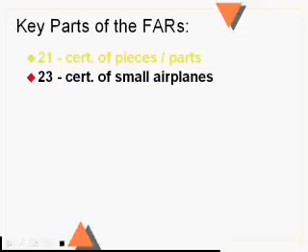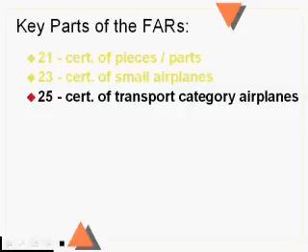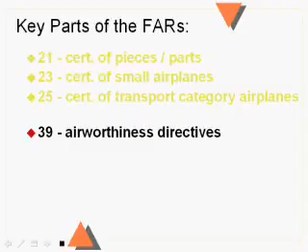If you want to certify an airplane, build an airplane and mass produce it and have it used as a transport category aircraft under FAR Part 121, that is for an airline, then that airplane has to be certified under Part 25. Of course, you've heard about airworthiness directives, and I'll talk a little bit more about it on another slide, but FAR 39 covers airworthiness directives.

FAR 43 and 91, interestingly enough, if you look in your FAR book, FAR 43 is there, and it's FARs for pilots, and you're going, wait a minute, FAR 43 is for maintenance. Well, you got a good point there. It does say, however, that anyone doing maintenance has to comply with FAR 43, and guess what? There are privileges and limitations for pilots and their ability to do a certain amount of preventative maintenance in FAR 43, so we're going to cover a little bit of FAR 43.

Effectively, FAR 43 is to airplane mechanics what FAR Part 91 is to pilots. If you go fly an airplane, you got to fly well enough that you don't violate Part 91, whereas when a mechanic is working on an aircraft, they have to do their job well enough so that they're not violating Part 43. Now, I'm sure you've read lots and lots of FAR Part 91, and the first half of it, the vast majority, is how well you have to fly, but that's not the part that we're going to cover in this class.

We're talking about certification requirements, about making sure the airplane is airworthy, not how to fly it. So we're going to talk about that second half of Part 91. It starts around 91.200 and goes up into the 91.500s. And that's the things that say, when do you have to do a 100 hour? When do you have to do an annual? When do you have to have an ELT inspected? What things on the airplane can be broke and you still get to fly the airplane? It's that second half of 91.

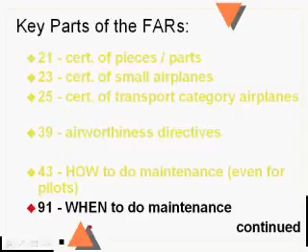There's a couple of things at the beginning of 91 we'll look at here shortly, but it's mostly that second half of 91 that you might not have looked at very closely that we're going to cover in this class to make sure that you can determine whether or not your aircraft is airworthy and is safe to fly. Like I said a minute ago, FAR 121 is the regulations that cover scheduled air carriers, or the airlines.

Part 135 is air taxi operators, or sometimes called unscheduled airlines. If you go to a fixed base operator and you want to give them $500 so they'll fly you in a twin engine airplane to Vegas, so whatever happens in Vegas stays in Vegas, and then you fly back and you want to go whenever you want and you're not going to do the flying, that would be a non-scheduled air carrier, or a charter operator is also another term for air taxi operators. That's under 135.

Now, flight schools, almost all of them in the United States, are certificated under 141 right now. Embry-Riddle at Prescott has some certificated under 141 and some under 142. You don't have to be a certificated flight school to get flying lessons. You just need a certified flight instructor and an airworthy aircraft, and away you go. But a lot of flight schools get their curriculum approved by the FAA, and the FAA approves them under FAR 141 or FAR 142. You probably heard of that. But there's another one in the 140s, 145.

That's repair stations. If you want to fix aircraft, you don't have to have a mechanic certificate to start a repair station. I'll give you a couple examples here. Let's say you're working in the military, you worked at the Air Force Academy, you've been working on their airplanes, and they have some piston engine airplanes there, and all you do is overhaul magnetos. You fix engine magnetos. You get out of the service, you don't have a mechanic certificate, but gosh darn it, you're really good at magneto repair.

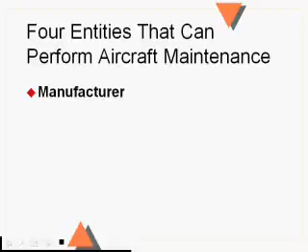There's 4 different, I guess not organizations or people because they're not all people, that can fix flying machines. The original manufacturer, Cessna, gets to fix Cessnas. Lycoming gets to fix Lycoming engines. McCauley gets to fix McCauley propellers. Garmin gets to fix Garmin GPSs. Cleveland makes brakes and wheels. They get to fix their own brakes and wheels. So if a manufacturer made something, they get to fix it.

Also, if you have a mechanic certificate, an airframe and/or powerplant mechanic certificate, or an A&P mechanic certificate, then you can work on airframes and powerplants. If you are a certified repair station under Part 145, you can repair anything that's inside of your limitations on your air agency certificate. And we're going to talk about it in a different lecture.

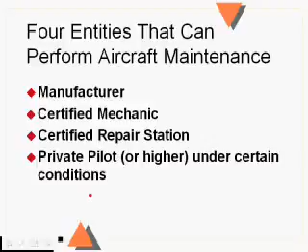If you have a private pilot certificate or higher, under the right conditions, you can do preventive maintenance on an airplane. Like you can change the engine oil and the filter, you can change the tire, you can clean out the spark plugs, you can service the battery, you can paint some of the airplane, you can redo the upholstery on the inside. There's quite a list of things in FAR 43 Appendix A that you can do as a private pilot. So these are the 4 entities that can fix flying machines.

Okay, what about getting your airplane certified? There's type certificates, and then there's production certificates. There's an old saying in aviation: how do you end up with a small fortune in aviation? It's by starting out with a large one. I'll give you an example. You start out with $2 million, had this great idea for a new airplane.

So you hire a bunch of engineers to come up with data to prove to the FAA that this is a safe airplane design. You build one or two prototypes, you fly it around, you fix a couple of things here, the FAA tells you to fix a couple of things there, and you demonstrate to the FAA that this design is safe. If somebody built it, it would be a good airplane and you could get it certified. Whenever you're building an airframe or an engine or a propeller, you have to prove to the FAA that it's a safe design. That's a type certificate.

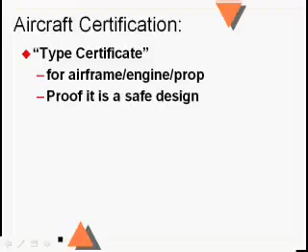So you spend $2 million getting your aircraft type certificated. But now you ran out of money. So you sell it to somebody for $1 million. They have $2 million, and with their other $1 million, they get a production certificate. A production certificate is kind of like a repair station. You have to prove you have trained personnel. You got to prove you have the equipment and facilities to do the work.

You got to have all the engineering data from the type certificate, and you got to prove you have an inspection program set up so that as you put the airplane or the engine or the propeller together, somebody comes behind the first person and checks to make sure it got done right. If you can demonstrate to the FAA that you can do all these things in a production line, then the FAA will give you a production certificate.

Now that you have a production certificate, essentially proving that you have what it takes to mass produce a bunch of these airframes, engines, or propellers, now you can mass produce them and you can sell them as a certificated aircraft, engine, or propeller. But that is technically a separate system from the type certificate.

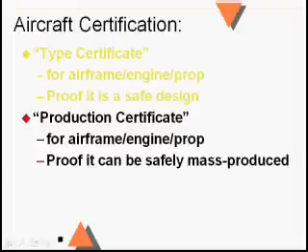Now, big aircraft manufacturers like, let's say, Piper or Cessna, they have the type certificate and they have the production certificate, and they didn't buy the type certificate from anybody. But they could sell the type certificate to somebody, but then they would have to generate a production certificate separately. So you got to get a type certificate to prove it's a safe design, and then in order to mass produce it, you're going to have to get a production certificate. In both cases, you got to prove this to the FAA.

Now that you've done that, as the manufacturer with your production certificate, you get to type up the airworthiness certificate, that half-page white paper with blue and black ink on it, and stuff it into the aircraft when you sell it. And essentially, that certificate is stating that when that aircraft left the factory, it was built exactly like the type certificate data said it was supposed to.

At that moment when it leaves the factory, they're gonna push it out the door and fly it around a few times, tweak a few things, make sure it's good. But when they hand you the bill of sale and you fill out the registration and you buy it brand new, that airplane is perfectly airworthy right smack at that moment. It's just like it just had an annual or progressive. The ELT has been inspected.

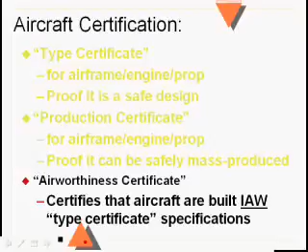The altimeter static system is good. All those inspections, there's no airworthiness directives on it. That airplane is essentially perfect and airworthy at that exact moment. Yay! I love perfect airplanes. I love imperfect airplanes for that matter.

Let's say you buy an airplane and you start flying it around and figure out that you wish it would go a little faster. So you try to figure out different fairings you can bolt onto the airplane to reduce drag. You think, I'd like to put a bigger engine in it so it'll go faster. Or you go from a fixed pitch propeller to a variable pitch propeller. Or you want to carry more stuff in it. Or you want to make the wings longer so it gets better gas mileage or can fly at slower speeds. These are all characteristics that change the airplane for the better.

Pretty much no airplane manufacturer will sell you an STC, or supplemental type certificate, because they want you to buy next year's model. If they think it's such a great idea, they'll put it into next year's model because they want you to buy the new airplane because they make lots of money. But other people, not the original equipment manufacturer, that's what OEM stands for. OEM is original equipment manufacturer. Pretty much anybody except the OEM does STCs.

For instance, out at the flight line, we have a couple of Cessna 150s. They took out the O-200 that put out 100 horsepower and put in an O-320 that has 150. So that Cessna 150 went from 100 horsepower to 150 horsepower. How do you think it is flying that thing around at sea level? Pretty fun. You could go pretty fast. You could tow gliders if you wanted to. This changes the characteristics for the better. You can put vortex generators on the airplane so it'll stall at slower speeds.

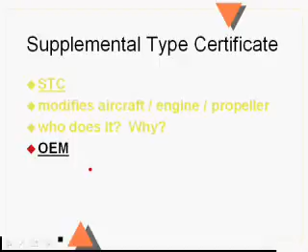One STC is an autogas STC. If you have an older airplane that'll run off of 80 or 87 octane, you can get an STC to run it off of 87 octane car gasoline, or MoGas as it's sometimes called. One could argue that improves the characteristics of the airplane because it'll burn less expensive fuel. That one's just a paperwork STC. You don't actually have to change anything. Well, I take that back. You have to put a placard by the fuel tank opening that says you can also put auto gas in it. So I think that's enough for supplemental type certificates.

Airworthiness directives, or ADs. Just like STCs, nobody calls them Sierra Tango Charlies. ADs, nobody calls them Alpha Deltas. They're ADs, or airworthiness directives. They come out every 2 weeks. Every single airworthiness directive is an amendment to FAR 39, and since FAR 39 is part of the Code of Federal Regulations, and the Code of Federal Regulations are federal law, that means airworthiness directives are federal laws. That's why you have to comply with them. That's why they're mandatory. Typically, airworthiness directives are published because there's an unsafe condition on the aircraft.

Years ago, they had trouble with 172 seat rails wearing out, and when you rotated the airplane, your seat would slide back, you'd hold onto the control wheel and slide back, pulling the control wheel with you, and the airplane would stall and somebody would get hurt. In fact, some people got killed doing that. So usually the aircraft manufacturer will send out service bulletins saying, hey, you need to fix this problem. But service bulletins under FAR Part 91 aren't mandatory. They're mandatory under 121 and 135.

So if people don't fix enough of them and another person has an accident, the FAA tells Cessna, fine, people aren't doing your service bulletin, we're going to make it mandatory, and they'll send it out in the form of an airworthiness directive telling you that something's got to be inspected, something's got to be repaired, maybe there's a part that's no good, you've got to take it out and put in a new one. It varies quite a bit by airworthiness directive.

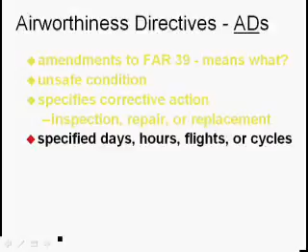It may say you have to inspect it or replace it within so many days, like you get 180 days, or within the next 100 hours, or before the engine gets 2,000 hours on it, or before the next flight, or over the next 100 flights, or engine cycles, engine startings. In particular on jet engines, they count how many start cycles, or on airplanes that are pressurized, they count how many pressurization cycles, or how many times you put the landing gear up and down. That's a cycle. So every single one is different on when you get it done.

If you own an aircraft, they are going to mail you the airworthiness directives that apply to your airframe, engine, and propeller. And if you don't understand what it says, you really need to take it to a mechanic or a repair station and say, hey, here's this airworthiness directive. Does it apply to my airplane? And if the answer is no, the mechanic or the repair station will write in your logbook saying this airworthiness directive doesn't have to be complied with because it doesn't apply to your airplane. But if it does, you got to take care of it.

In fact, the FAA, since they're mailing you the airworthiness directives as the owner, they are going to hold the owner responsible if they fly the airplane or they let somebody else fly the airplane. Even though an airworthiness directive was supposed to have been done, the owner is definitely going to get violated.

Also, mechanics and repair stations, when they do 100-hour or annual inspections or progressive inspections like we do at the flight line, every time that progressive inspection or that 100-hour or the annual gets done, the mechanic or the repair station is signing it saying, I certify I have inspected this aircraft in accordance with a 50-hour progressive inspection or 100-hour and annual, and certify it to be airworthy.

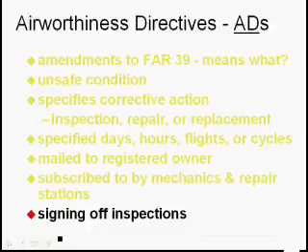At the moment they sign it, they have checked every airworthiness directive against the airframe, the engine, the propeller, the radios, the brakes, the ELT, the rotating beacon, and there aren't any outstanding airworthiness directives, so they get to sign it off. But it's only perfect at that moment. Now it's up to the registered owner to make sure that anything else that comes in the mail gets taken care of. And I already told you about signing off the inspections there.

Now, who's going to get violated by the FAA if the airworthiness directive isn't complied with? Absolutely positive, it's going to be the owner. If they get an airworthiness directive and they don't take it into the shop and get it complied with, and that airplane flies, whether it's the owner or they loan it or lease it or rent it to somebody else, the owner's going to get busted.

Okay, if the airworthiness directive came out before the 100-hour or the annual or the progressive inspection and the mechanic or the repair station missed it, they're going to get violated by the FAA if they signed off the inspection. But if they sign off the inspection, say, on August the 25th, and the AD comes out on August 30th, it's not their responsibility to take that airplane. They don't own the airplane. It's the owner's responsibility.

Now, you're all probably thinking, well, you know what? I don't own an airplane. I'm not a mechanic or a repair station. What about the pilot? What about the rental pilot, the pilot in command of somebody renting an airplane? Well, the FAA really doesn't want you flying airplanes that have airworthiness directives that are outstanding and haven't been complied with.

However, since they're not mailing them to you, it's very difficult for the FAA to violate a rental pilot if an airworthiness directive hasn't been complied with, because they aren't mailed to you, and there's nowhere you can look in a logbook and say, here's this airworthiness directive, because if nobody wrote it in there, it would be blank. So I'm not saying it's legal and safe to fly airplanes without airworthiness directives being complied with, but it's very hard for the FAA to violate a rental pilot. In fact, I'm going to say they can't violate a rental pilot if they flew an airplane without an airworthiness directive being complied with, because there's no good way for the rental pilot to check it.

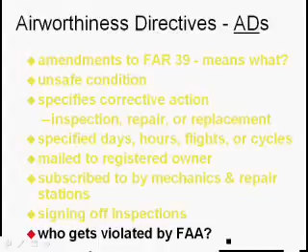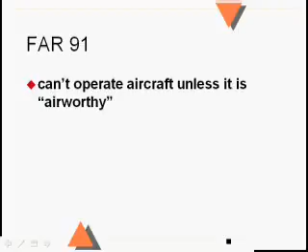Okay, there in the front part of FAR 91 is paragraph 7 or something like that. It says no person may operate an aircraft unless it's in an airworthy condition. Problem is, it doesn't do a good job of telling you what airworthy is. You look up in the front in Part 1 and it doesn't say, well, here's this big list of 25 different things to check, and if you check all that, the airplane's airworthy. So this is kind of the catch-all FAR. If you fly an airplane and it's not airworthy for any reason, technically the FAA can get you for it.

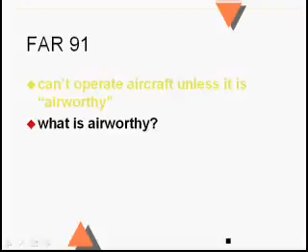What is unairworthy? I guess that means the airplane's not safe, for sure, but definitely unairworthy means it doesn't comply with the Federal Aviation Regulations. It also says in the beginning of Part 91 that the pilot in command, the PIC, is responsible for determining that the aircraft is in a condition that's safe for flight.

So here's the second paragraph where the FAA gets to pound on the pilot in command, because it's their responsibility for making sure the airplane's safe. Now, it doesn't mean the pilot in command has to do the pre-flight inspection. Somebody else can do it and come up and say, hey man, I did the pre-flight and it's good. It's up to the pilot in command to decide, does this person know what they're doing when they're pre-flighting the airplane.

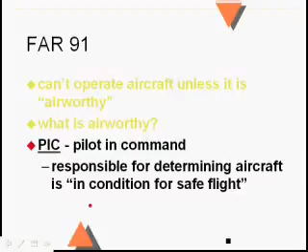In particular, under FAR 121, under the scheduled airlines, the pilots don't do the pre-flight. They do a walk around, but they don't do the whole pre-flight. They don't stick all the tanks and check all the hydraulic reservoirs. Somebody on the ground does that, but they sign it in a maintenance record that's in the airplane. We'll get to that in a later section. But the pilot's still responsible for making sure that stuff got done.

There's a list of things you got to have on the aircraft and be working. To go VFR day, you got to have a compass, airspeed indicator, altimeter, engine RPM gauge, oil pressure, oil temperature, like that. And none of those things can be broken and still go if you're VFR day. If you go flying VFR at night, on top of the things you need for VFR day, you also need a few more things like position lights and an electrical source of power, something like that.

And under IFR, you got to have everything you need for VFR night. Plus, you got to have a directional gyro, an attitude indicator. You got to have two-way radio communication. You don't have to remember anything on those lists for this course. You can look them up whenever you need to.

But there's also more things under Part 91 that, depending on your type of flight, you got to have on board the airplane. For instance, if you're going to operate for hire, you have to have an operational landing light, and that includes paying a flight instructor. A paid flight instructor is operating for hire under Part 91. You got to have operational DME equipment above flight level 240, and it's a very convoluted paragraph. It's really big, takes up like a page.

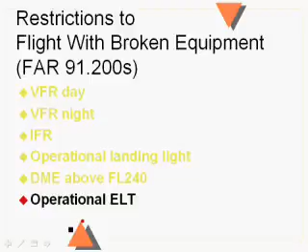You got to have an operational ELT. There's a few exceptions where you don't have to have one, but it's in FAR Part 91, the things you got to have in order to fly under certain conditions. So that's one place you would have to look. Now, if you want to fly with things that are broken, there are 3 different ways to get that done. You can either use a checklist that's in Part 91, you can get an approved minimum equipment list, which we'll talk about here shortly, or you can get a special flight permit, which also I'll tell you about here shortly.

Okay. You go out to the airplane, you're pre-flighting it, and the cigarette lighter's broken. You still want to go flying. You can use FAR 91, it's in the 200s, to legally fly an airplane, even though something is broken. I call it my 4 checks plus 3 actions found in FAR Part 91. You have to check 4 things, and then you have to do 3 things, and then if all of these things are good, you can go fly the airplane. You've heard of this before, so I'm going to go over it pretty fast. First, you got to make sure it's not required by FAR Part 91.

Is it day VFR? You don't have to have a gyro. If you're above flight level 240, you've got to have a DME. If you're operating the aircraft for hire under Part 91, you have to have an operational landing light. So there's several places in FAR 91 where you're going to have to look to see if it's required. You're also going to have to look in the approved flight manual.

In the back of the approved flight manual, the vast majority of the time, there's a list of components that have to be on the airplane and working under certain conditions. You have to comply with it as well. You're going to need to check to see if this component is required by an airworthiness directive.

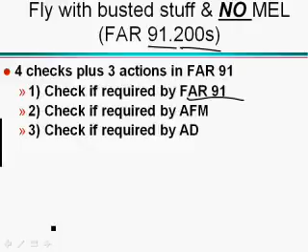Now, this is extremely uncommon, but what I find rather interesting is that if you have a turbine-powered aircraft and you have a NiCad battery, there's actually an AD about a temperature indicating system for the pilot. And there's an AD that says every single aircraft that has a NiCad battery has to have a temperature gauge for the NiCad battery, because NiCad batteries can have a thermal runaway and get too hot. But most of the time, this is the least likely one that you're going to check and have something be a problem.

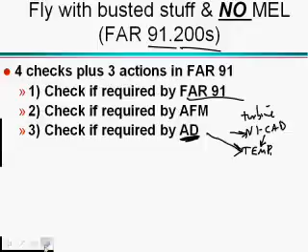You also have to check and make sure that if this component is inoperative for this flight, it's not going to be a hazard to the aircraft. Like if you're flying day VFR from Prescott to Kingman, I think it's okay if it's day VFR to Kingman that you don't have a directional gyro. It would not be a hazard.

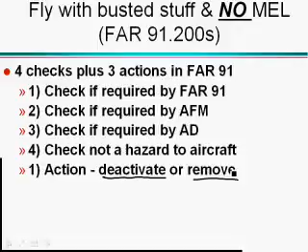So if you check all these things and they're not required and it doesn't make it hazardous to operate the aircraft, then you either have to deactivate the component or you have to remove it. Unfortunately, this is a maintenance action, and so is placarding it. You have to put a placard next to or on top of it, and it has to say inoperative. And I'm not talking a yellow sticky. It's got to be something permanent.

So that way, if somebody else operates the airplane tomorrow and they don't pre-flight it as well as you, they'll easily see this placard saying that it's inoperative. Like if it's the directional gyro and they're going to go fly IFR, the gyro is required by FAR, and I'm sure it's going to be required by the approved flight manual, and one might consider that not having a directional gyro flying IFR would be hazardous.

You definitely want other people to know, so that's why you're going to have to put a placard that you deactivated the component or you removed it, so that they'll know the next time they fly the airplane that something's wrong with the airplane and they need to pay attention to it. And since both of these two items are maintenance, you have to write it up. An airplane is unairworthy when you do maintenance until you record what you did in the maintenance records.

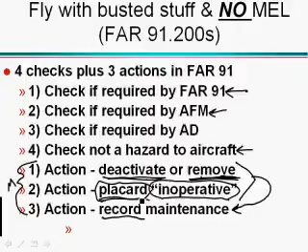Now, the problem with this is most of the time this takes a mechanic to do, since your privileges under Part 91 as a pilot don't have very many things that you can fix. So most of the time, in order to do this, you're going to have a mechanic come out and deactivate or remove it, placard it, and then write the maintenance in.

Now, there's another way to be able to fly the aircraft when something's broken and be legal, moral, and ethical. And that's having an MEL. I'm not talking multi-engine land, I'm talking minimum equipment list. Minimum equipment list is also described in FAR Part 91 in the 200s. When you first get an airplane brand new out of the factory, the manufacturer will come out with a master minimum equipment list, an MMEL.

But it only has the things on it that the manufacturer installed. Let's just say that it's a Lear 65. That's a big old honking $30 or $40 million business jet, and it comes out of the factory and it's green. They haven't even put the paint job on it. It just barely has minimum flight instruments and radios.

They fly it to some place where they're going to put the interior on it and put a paint job on it, and they install a blender and a DVD player and a computer and a hot tub and a vibrating bed and another blender, and a gold-plated toilet seat. They install all kinds of other stuff on it.

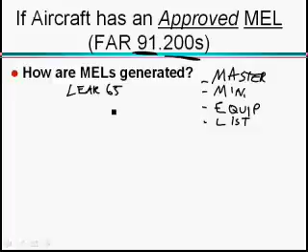So this master minimum equipment list doesn't have everything on it. So what you're going to do, as soon as you put all that stuff in the airplane, to have that all installed, you're going to write up an MEL, a proposed MEL. You're going to write up a proposed MEL, and you're going to send it to the local FAA office, the FSDO,

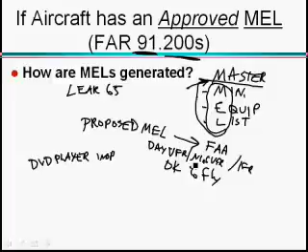and they're going to look at it, and you're going to write on it, if the DVD player is inop, you're going to say that day VFR, night VFR, or IFR, if it's busted, it's okay to fly. You're going to put everything on the aircraft that you installed, the VCR, the DVD, the vibrating bed, everything. If the toilet doesn't flush, it's still okay to go flying. You're going to write up in there everything else that's on the airplane, in addition to everything that was on the master minimum equipment list.

So now you get it approved. When you get it approved, then they are going to give you a letter of authorization, and you're going to keep that in the airplane in the same binder as the minimum equipment list. Now that's what it's going to be called, the minimum equipment list for that one particular aircraft. When you're writing it up, you're going to take into account anything that it says you've got to do in the FAR, anything that's in the approved flight manual.

You're going to check any ADs that might apply to the airplane. You're going to make sure that it's not hazardous. And you're going to take all this stuff into account when you write that MEL up, and the FAA is going to approve it. So now you're going to keep the letter of authorization, and you're going to keep the minimum equipment list on board the aircraft.

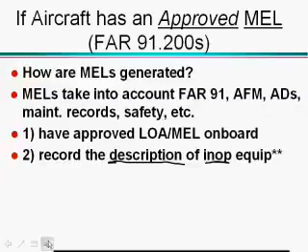When you go out to the airplane and you pre-flight it, anything that's busted, you're going to write it up. That piece of paper that you write it up on is part of the maintenance records. You're also going to look at everything else that everybody else wrote up. See, part of an MEL is it's going to tell you what you have to do in order to go flying, and it may not say you have to placard it. So that's why you're going to write it down, and that's why everybody else is going to write it down. So in the aircraft, as part of the maintenance records, is what's broken on the airplane, so everybody that flies the airplane can now know what's wrong.

So now you've got a list of the stuff that you find is inoperative, the stuff that everybody else found is inoperative, and you're going to read the MEL and see what it says you can do. If it's single pilot and there's a directional gyro on the co-pilot side that's busted, it's probably going to say you can go flying even IFR because you don't need to look at it. If the DVD player is broken, I think it's going to say it's okay to go flying. Also, if it has an O, then it tells you that the operator can take care of it. That means the pilots. If it's got an M, that means you need maintenance. Essentially, you've got to have a mechanic come out and take care of it.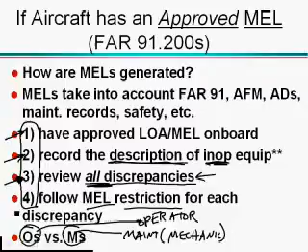These four things right here are the four things you're going to have to do. If an airplane has a minimum equipment list approved for the aircraft, you have to follow it. And you're going to have to be legal, moral, and ethical: make sure that the letter of authorization and the MEL are on board the aircraft. Make sure that you write down anything that you find wrong. Make sure that you look at the list of other things that have been found wrong before you got there. And then you have to follow the MEL limitations, restrictions, whatever it says you can or cannot do, you've got to do it.

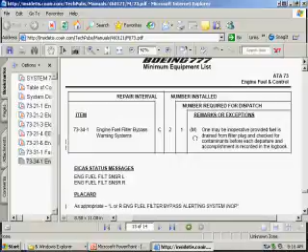I have an example here of a Boeing 777 minimum equipment list. I know it's probably really small and hard to read, but right here it says for the engine fuel filter bypass warning systems, there's 2 installed and you've got to have one that works. And M right here says maintenance has to do something. So 1 may be inoperative provided fuel, blah, blah, blah. So it's a little bit lower. Whoops, went too far.

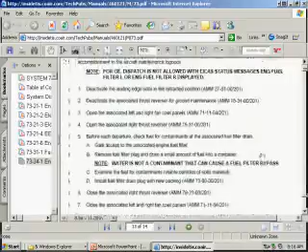A little bit lower. Wow, this one's pretty rough. Here it says maintenance, M, and then it lists all these steps that a mechanic is going to have to take in order for you to be able to fly the airplane. However, whoops, I got another one.

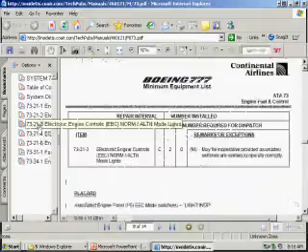Here's a different one. Here's for the electronic engine controls, EEC, normal mode. If that's busted, there's 2 on board the airplane. 0 of them have to work if you want to get dispatched, if you want to go flying, and the remarks is O. O means the operator.

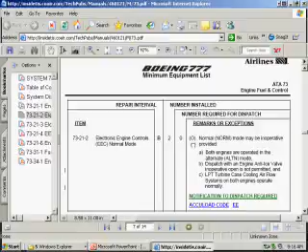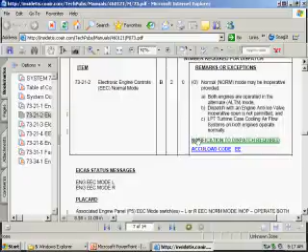So it says norm mode may be inoperative provided both engines are operated in the alternate mode, and dispatching with an engine anti-ice valve inoperative is not permitted, and the low pressure turbine case airflow systems on both engines have to be operating normally. And of course it says right here notification to dispatch is required.

So if it says O, then that means the pilots can take care of it. And if it says M, then that means maintenance is going to have to take care of it. You're going to have a mechanic come out and help you with it. And they're going to have to do something.

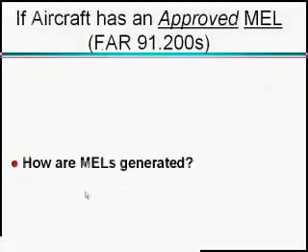Okay. Also in FAR Part 91, back in the 200s, it says if it's a turbine-powered airplane, so it could be a Piper Malibu or a Piper Meridian that's got a Pratt & Whitney PT6 out in the front, you can never ever use that 4 checks and 3 actions method from FAR 91, which means that you're going to want to get an MEL.

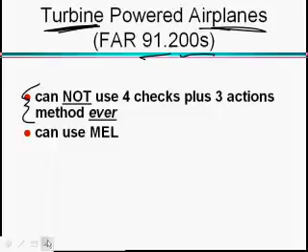And of course you can use the MEL, but let's say that the airplane is brand new and you haven't gotten the MEL done yet, and the DVD player breaks. Even though it's not a safety of flight item, you can't use the 4 checks and 3 actions method and go, well, it's not required by an AD, the FARs don't require it, blah, blah, blah, it won't be hazardous, we'll mark it inoperative, we'll deactivate it, and we'll go fly.

Nope, sorry. If it's a turbine-powered airplane, you can't use this system under Part 91, which would mean that if there's no MEL, if anything broke on the airplane at all, you're grounded. You can't fly. So guess what people are going to do who buy turbine-powered airplanes?

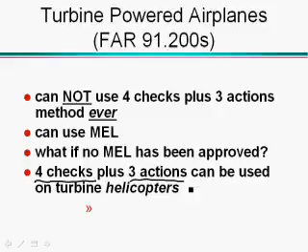The very first thing they're going to do is get their MEL approved immediately, and they're going to write up all the little things on the airplane that might possibly break so that they can fly the airplane without being stuck somewhere. However, interestingly enough, this 4 checks and 3 actions out of FAR 91 can be used on turbine helicopters.